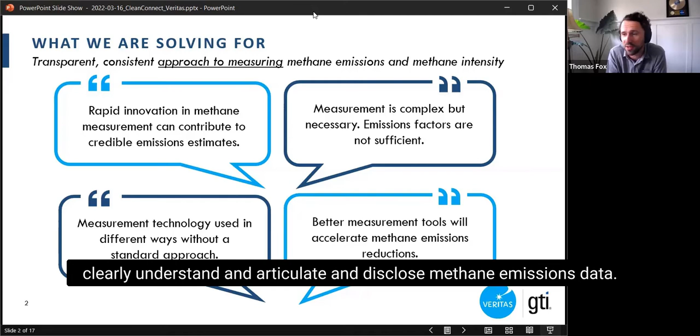So today I'm here to present on this initiative, which again is being led by GTI. Highwood is just supporting the effort. It's a pretty big initiative and pretty exciting, and we think it's going to have a big impact. So the guiding force here is the fact that we're seeing an emergence in a need to clearly understand and articulate and disclose methane emissions data.

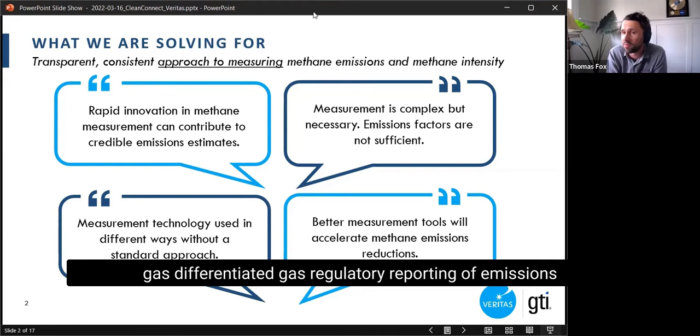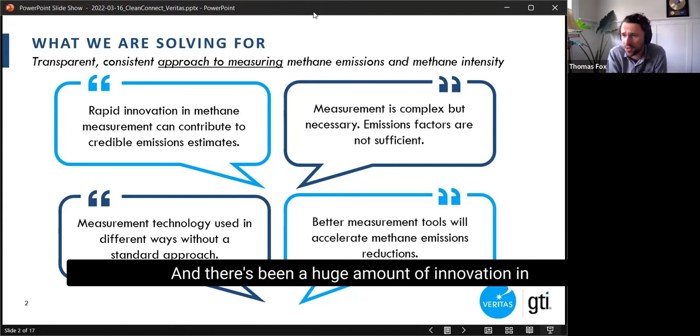We're seeing a big push for responsible gas, or differentiated gas, regulatory reporting of emissions data, and so on. And in the past, whether it's methane intensity, which is emissions divided by production or throughput, or just emissions, a lot of reporting and quantification of emissions has relied on emissions factors, which are industry averages. And there's been a huge amount of innovation in the last 5 to 10 years in methane detection and quantification technologies that could potentially be used to improve how we estimate and report our methane emissions.

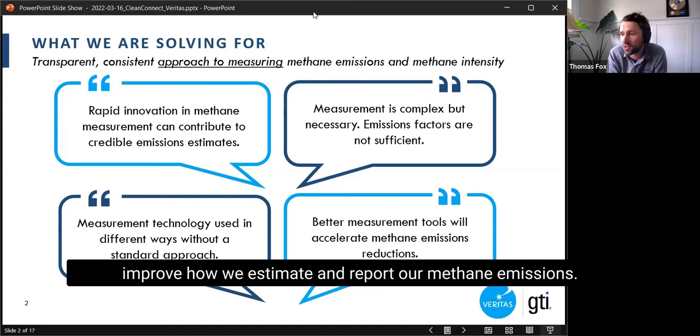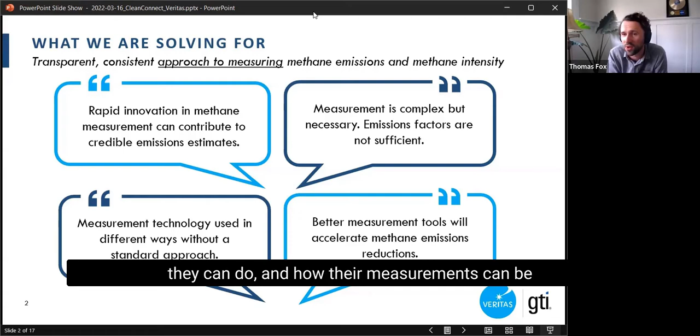And so Veritas is really about building out a methodology for how we understand these new technologies, what they can do, and how their measurements can be incorporated into our understanding of emissions by company. The goal of Veritas is to develop a set of standards, which can be thought of as really a methodology to guide the deployment of technology to acquire the right data for demonstrating methane emissions at a facility scale or company scale, and then how to use those measurements and perform reconciliation with bottom-up inventories to get a better overall estimate of methane emissions or methane intensity.

Lots of folks involved. There's a really great group of foundational sponsors, companies primarily in the US who are really excited about this effort and want to see it succeed. GTI, as I said, is the lead on this project. Highwood Emissions Management and SLR are supporting it, and then there's all kinds of other folks involved. There's technical committees for each segment of the supply chain. We're covering 6 segments, and I'll cover that in a second. There's an expert panel with leading academics who are providing comments on the standards as we develop them. There's vendors involved and regulators and companies who are doing demonstration projects and various other stakeholders.

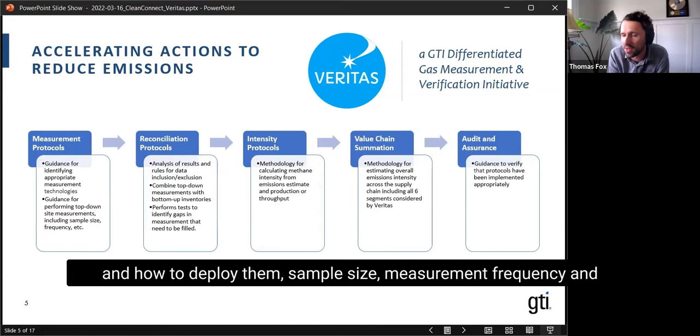Reconciliation is kind of this new idea of if you acquire estimates around emissions in different ways, how do you account for the differences in those estimates? And so we're seeing this in OGMP and now in Veritas, and others are talking about what this looks like. But effectively, it's looking at your bottom-up inventory, and then looking at site level measurements and trying to explain differences between the two.

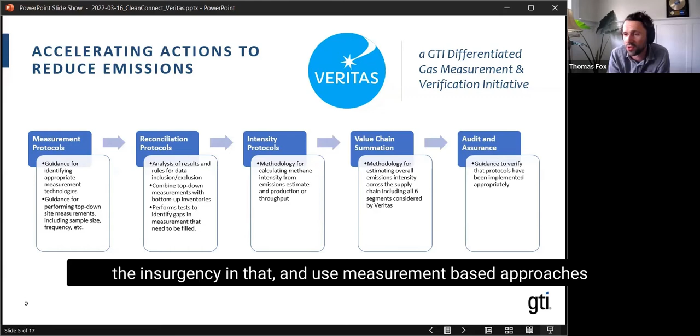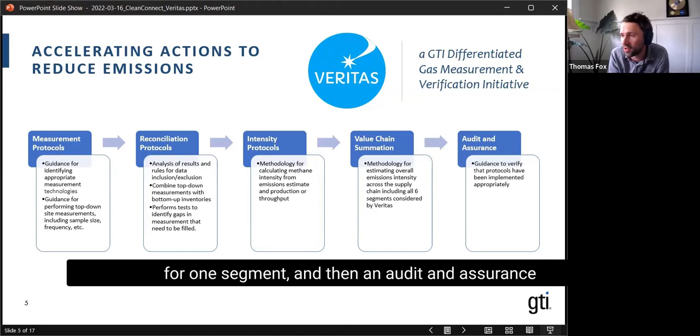And then we have intensity protocol, which is basically how to calculate methane intensity and account for kind of the uncertainty in that, and use measurement-based approaches to estimate intensity. How to consider methane intensity across the entire supply chain rather than just for one segment, and then an audit and assurance protocol for those who intend to leverage Veritas and to deploy it.

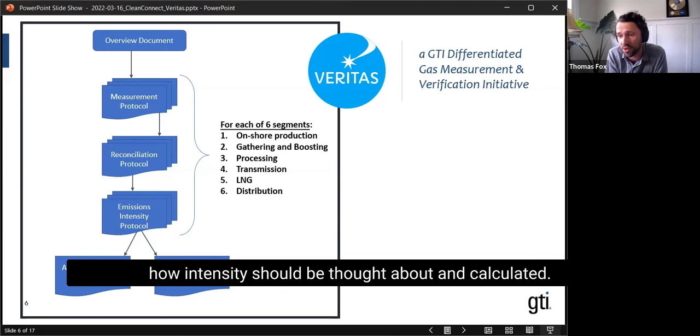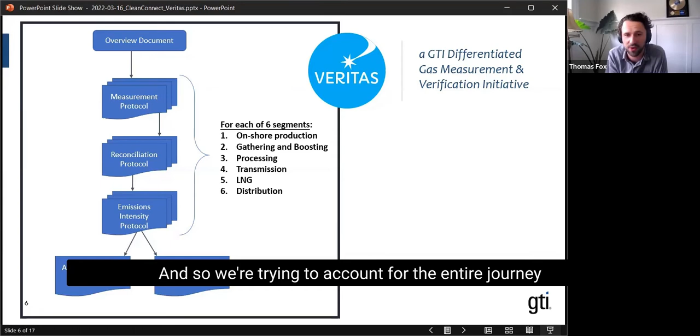So, for example, things look very different for a well site than they do for a transmission line. And so we're trying to account for the entire journey of the natural gas molecule from production, from the wellhead to end use, and even considering LNG as well.

Just quickly, I'm going to go through the measurement and reconciliation protocols. In the measurement protocol, and this is for production, but the general themes are going to be similar among the different segments. So the first thing is really to identify what measurement technologies exist. Obviously, there's huge diversity in options right now. I think there's well over 100 commercially available methane measurement solutions in existence.

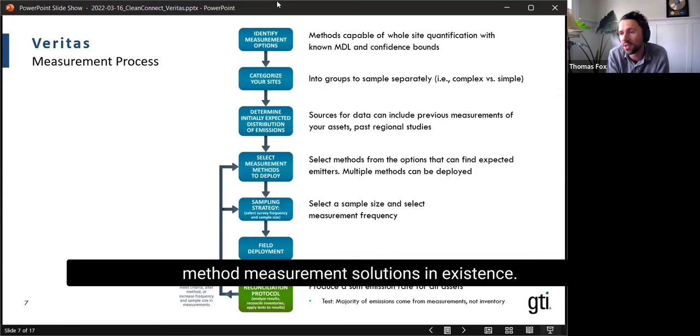Understanding how to apply these different technologies depends on considerations around what assets are within scope, and what kind of emissions are expected to come from those assets. And so we have a site categorization process which allows operators to tailor their deployment strategies to the types of assets that they have. So one example would be to categorize sites based on whether they're complex or simple, and the EPA is proposing to do this in their new draft regulations. An example would be well sites versus more complex tank batteries or compressor stations.

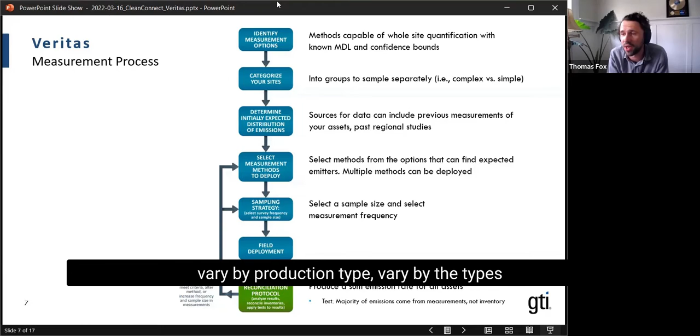And then, establishing expected emissions distributions. We know that expected emissions would vary by basin, vary by production type, vary by the types of facilities that you're looking at. So understanding the expected emissions profiles of the sites is important to understand and predict what technologies are going to be most effectively deployed at them.

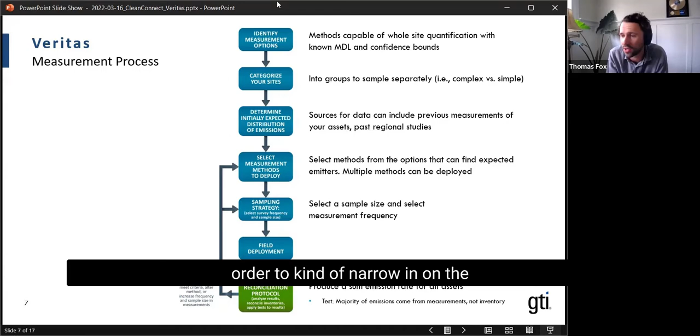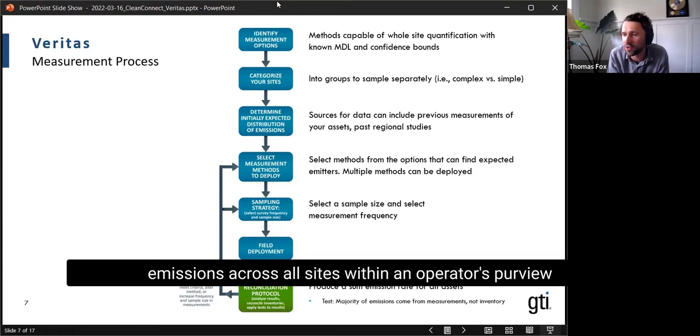And then we provide guidance for how to select and deploy the best available solutions, and establish sampling strategies. So measurement frequencies and sample sizes needed in order to narrow in on the right data that's needed for estimating overall methane emissions across all sites within an operator's purview, and then obviously deployment.

The reconciliation protocol looks at the data that's been collected during measurement, determines whether there's any data that needs to be removed from the data set, performs reconciliation, which I'll get into in a second here, and applies tests as well. So the reconciliation process consists of one of 3 pathways, and these basically depend on how sensitive the technology is that's being used for measurement.

So for systems with sufficiently low minimum detection limits that are able to capture the majority of the emissions that are expected to be emitted from a facility, operators will be able to rely exclusively on the measurement data and not necessarily have to rely on the inventories.

For systems with very high detection limits, where most of the measurements are expected to be anomalous events that are not accounted for appropriately in inventories, it'll be an additive exercise where the measurements and the inventories are added together.